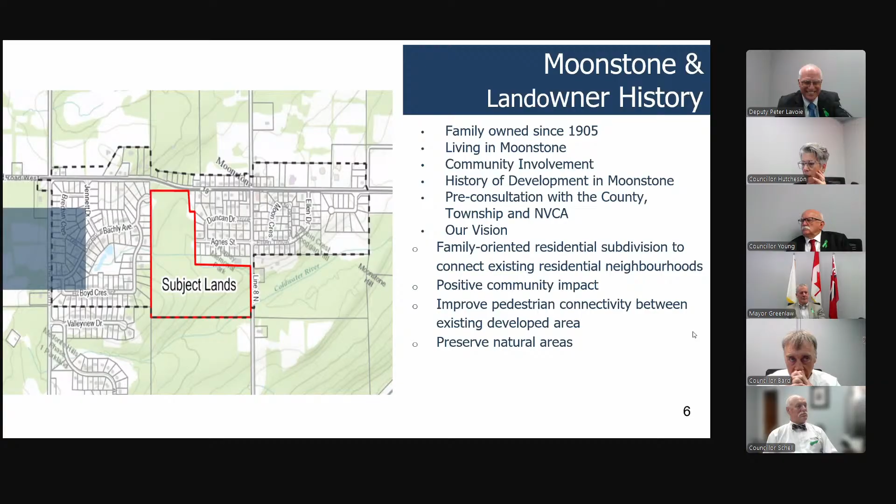Who's doing this? Andy? Okay. Okay, so just move ahead there, Andy.

Okay, so just as far as the planning background, your official plan has identified Moonstone, and in particular these subject lands, which have an area of about 24 hectares, as being part of the settlement area for the better part of 25 years or so. And so on that basis, we have, in your official plan, language which envisions or contemplates a development end state for these lands, and in particular to permit single detached dwellings. And of course, through provincial policy as well as your own official plan, there are a number of technical policies requiring subdivision applications to be appropriately supported. So to that end, let's just jump ahead there, Andy.

Again, there's a number of technical studies which accompany the application: environmental impact, hydrogeological, archaeological, geotechnical, hazard lands assessment, stormwater management, functional servicing, traffic assessment, as well as planning justification. So just in terms of the plan itself, again, 24 hectares, frontage on Line 8 as well as Moonstone Road East or County Road 19. Frontage on the county road of about 225 meters, frontage on Line 8 of about 250 meters. 68 proposed lots, and those lots range in area from 1,500 to I think 3,700 square meters.

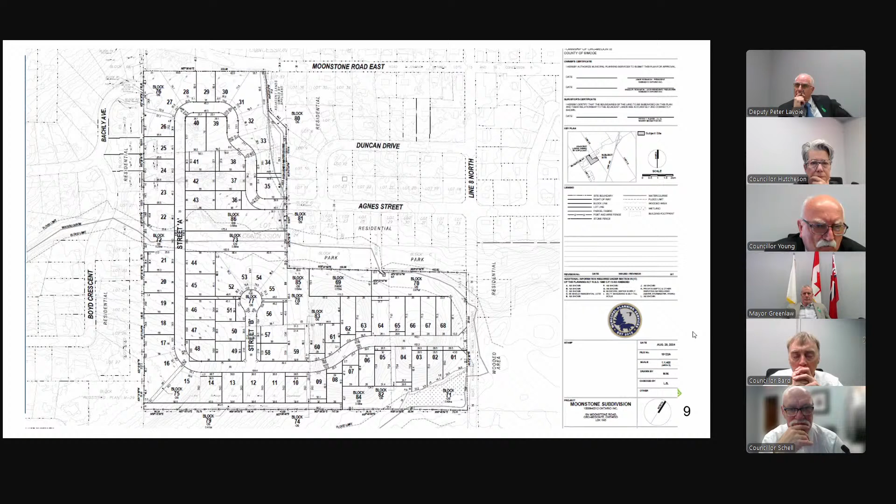The proposed parkland block is intended to complement or integrate with the existing park in Moonstone, Ramey Park, as well as a number of open space blocks which have been established or proposed through the site, essentially to accommodate existing watercourses, natural features, and existing drainage.

If we just jump ahead, what we have here is a conceptual rendering of the plan. It gives you a better idea of the context for integration of the parkland block, 3 proposed stormwater ponds, and the connection through existing Agnes Street as well as a direct connection to Line 8. No proposed connection to the Bachly lands to the west or to the county road.

Just next slide there, I think. Okay, so I'll just again try to walk through some of the salient aspects of the technical work that was done, starting with the environmental or natural heritage assessment. And the scope of this type of report, of course, is predicated on provincial policy and local official plan policy, which requires, firstly, the identification of natural heritage features and where identified, the protection and maintenance of those

features. The EIS also looked at species at risk, and again, in the identification of key natural heritage features, recommendations are focused on avoiding or restricting development in such areas, mitigation, and in a lot of cases, the work of the natural heritage experts doesn't end with a report like this. There's things that need to be monitored, things that need to be assessed as the site evolves in a development context. Next slide.

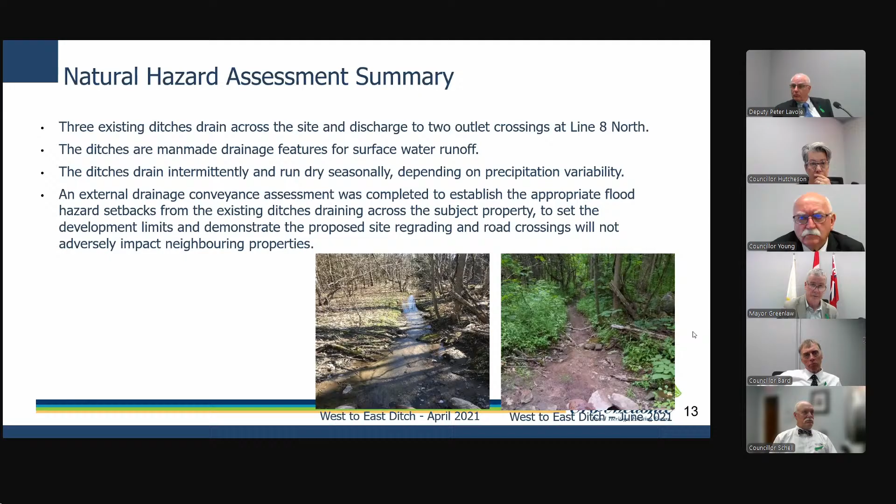And the next slide is just a visual of when the engineer takes on a study like this. Obviously, there's the pre-development situation and the post-development situation. And so, really, what these two illustrations help illustrate is that the nature of existing drainage through the site is essentially proposed to be maintained, but through design and engineering within the context of a subdivision plan, to ensure that the nature of those hydrologic flows are managed and maintained in the context of pre-development and post-development situations.

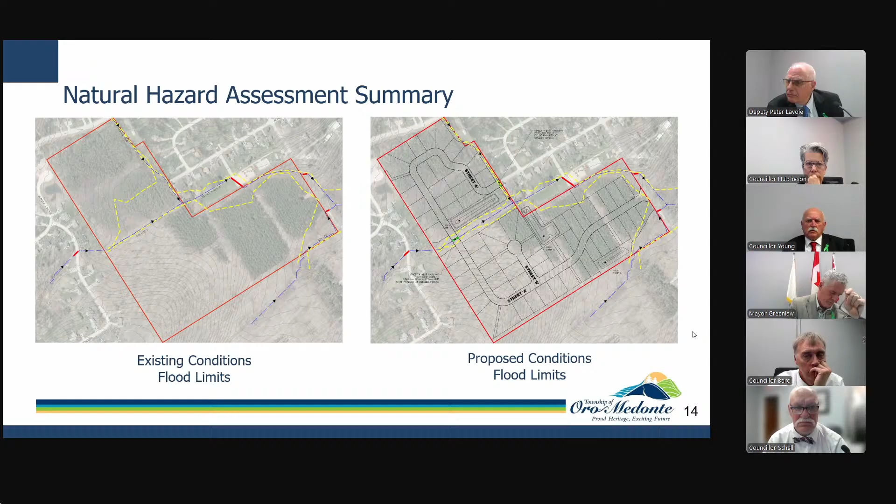So that's not a bad segue into stormwater management. And as we saw on the subdivision plan itself, as well as the rendering, what the engineers have proposed as far as stormwater management is a series of 3 inline ponds. And that certainly addresses the quantity scenario of stormwater storage itself. But then there's also the quality situation of essentially trying to ensure that as that water moves through the site, the quality of it as it leaves the site is improved.

And so that's where there's engineering design, and so we have design features like plunge pools, dry ponds, oil grit separators, or oil grit mechanical treatment devices. These are all things that are integrated as part of that stormwater plan. The report concludes that the post-development scenario can manage post-development flows to 1 to 100 year storm frequency, as well as the regional Timmins event.

So let's just move to the servicing summary. So again, Moonstone, as we're aware, is a partial service community. That means there is a water system, but septic servicing is by Class 4 septic systems on site. So a key element to the servicing assessment was the consideration of the nitrate criteria under the Ministry of Environment Reasonable Use Guideline.

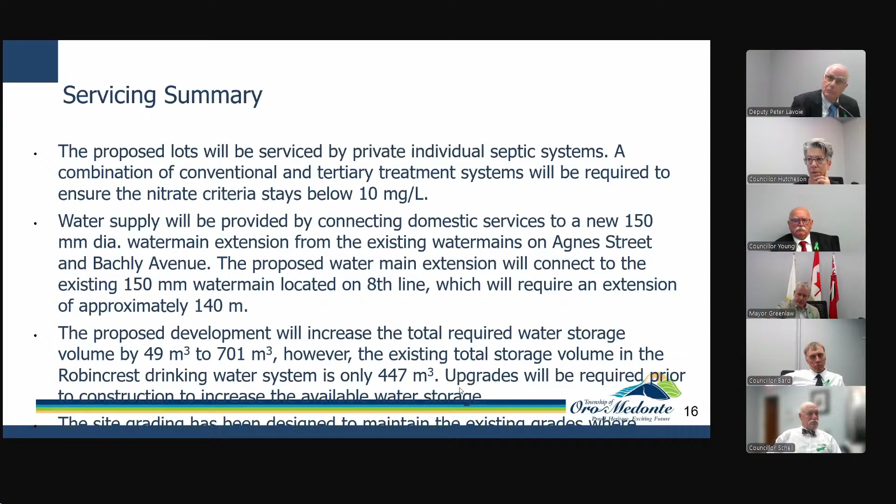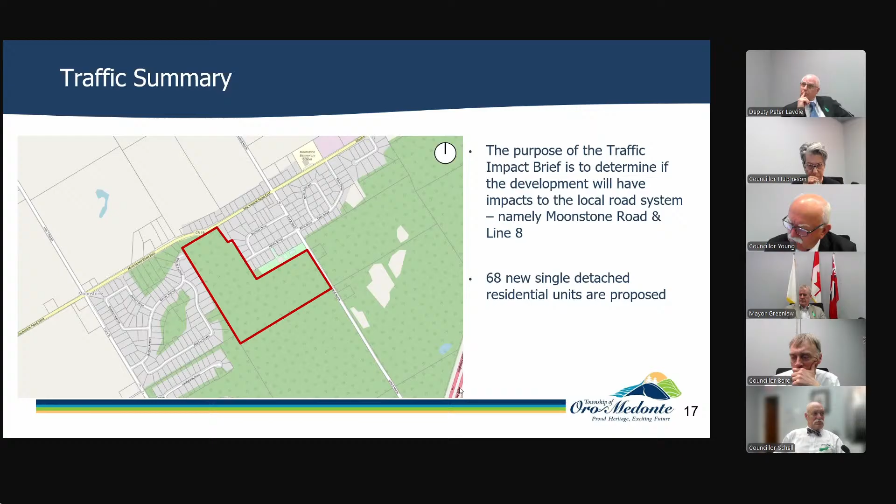And then we have, let's just move to the traffic summary. And so again, the traffic assessment considers the impact of 68 new single detached dwellings within the development area, within the settlement. And again, with those, let's just move to the next slide there. Again, with the understanding that new traffic connections are proposed from Line 8 as well as the extension from Agnes. And so then the focus of assessment becomes the pattern or modeling of traffic flowing from those new access points.

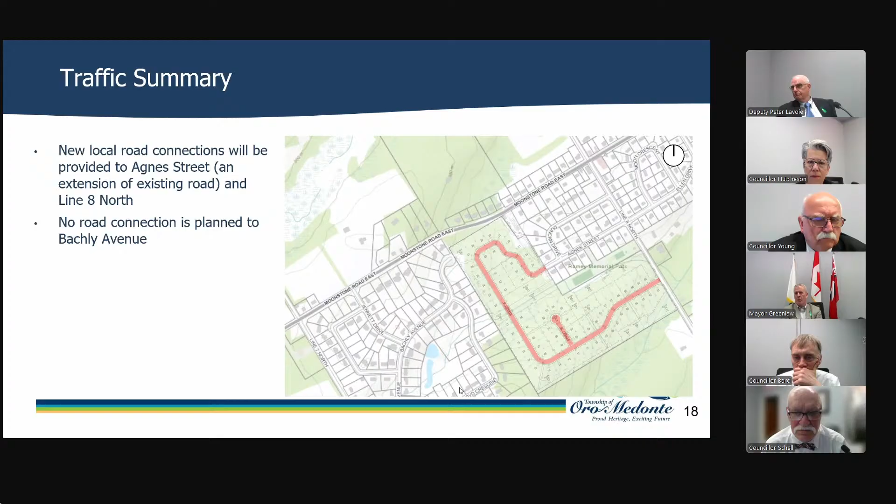If we just move to the next slide. And again, this just provides a graphic or an illustration of the assessment and consideration of those existing entrances, the current state of those intersections and their ability to accommodate existing traffic volumes compared to, again, proposed traffic volumes resulting from 68 additional residences. Overall, the study concluded that the proposed development would not have a significant impact on the adjacent road network, and the traffic generated by new residential units would be accommodated by the current road system with no need for road or intersection improvements.

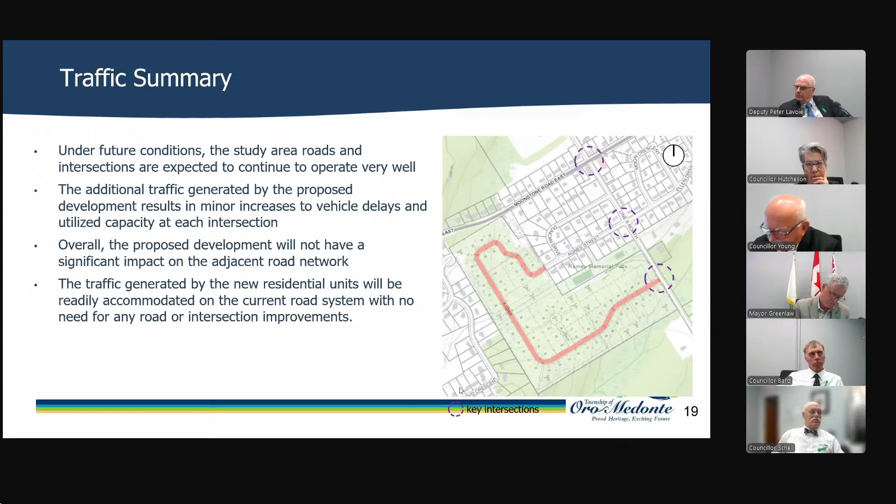And let's just jump ahead there. So as Jamie mentioned, we took the step of scheduling our own open house. That happened March 4th in Coldwater, and it was very well attended. And essentially, this presentation, which I've walked through tonight, was the presentation which was provided that night with each of the members of the consultant team speaking to their components of the application. And so obviously we took a lot of questions and heard a lot of comments formally and informally that evening.

And so certainly we heard concerns about existing stormwater infrastructure within the development to the west, and whether this application presents opportunities to address or fix any potential issues there. Concerns about traffic, construction impacts, stormwater management and site hydrology. We heard concerns about tree removal, environmental impact and buffering, as well as questions and concerns about the school. And again, support in some instances for the way that the road connection was managed by not intersecting the county road, not intersecting the Bachly subdivision to the west, as well as support for the park expansion and the manner in which it's proposed to complement the existing Ramey Park, as well as the aspect of the proposal involving trail linkages and that type of thing.

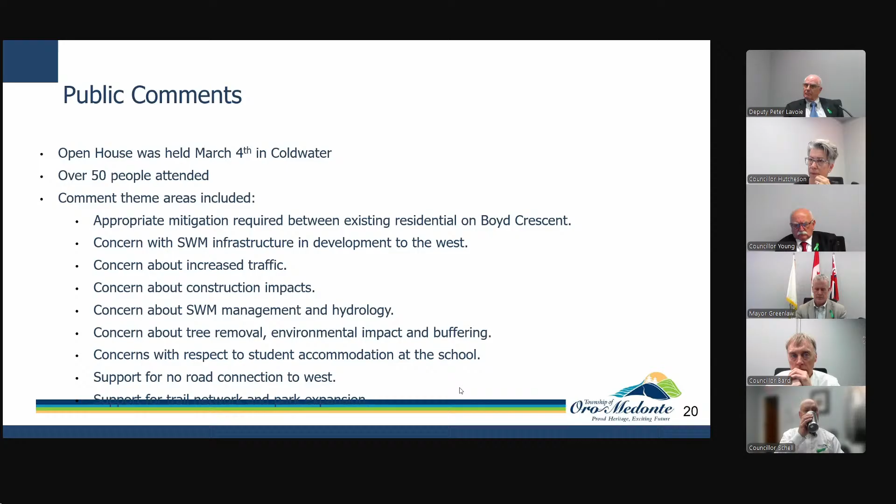And so from there, we look at next steps, and certainly as council is aware, applications like this, they're a marathon, it's not a sprint. And so even though there was certainly a lot of work that went into this leading up to the complete application of February 27th, public meeting is tonight, obviously, and we will move forward from there and work diligently with staff in the municipality and the various agencies that have put questions and comments on the table, as well as members of the public. With that, Mr. Chair, I'll turn it back to you, and if there's questions and comments, we'll certainly address those. Thank you very much, Mr. Jones.

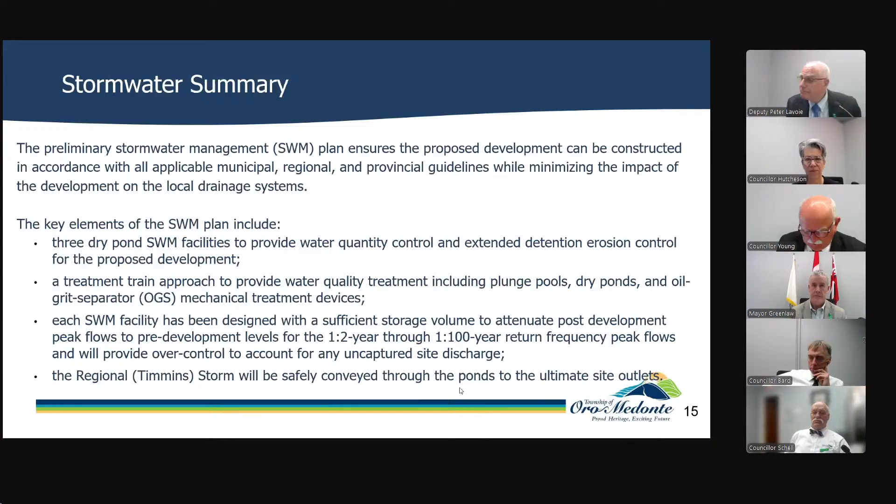Okay, do we have any questions for Mr. Jones or for staff with regard to the current presentation? Yes, Councillor Young. Thank you, Deputy. I've just got a couple of questions. I've been approached, or at least asked by some residents in Moonstone there, Valley View. And I know you got some long, thin areas there, which appear to be blocks. I'm looking at 75, or at least 15, 16, and 28, 27, and looks like 9 and 10. What are those long corridors? They've been named.

Are they on that? So, I'm sorry, Mr. Chair, what's the reference? Do you have the reference to a block number? Yeah, I'm just going to give them a minute here. Is it block 75? Okay, block 75. Yeah, it is block 75, and it's just a long corridor. So block 74, block 75, 76. Those are the trail corridors that are proposed to integrate and essentially offer some form of pedestrian passage, walking, running, biking, to the trail system.

Okay, the reason I asked is that, again, this is in the preliminary stages, and I've had residents advise me, whether those corridors can be extended to Valley View, otherwise the people that live in that area have to walk completely around, as opposed to simply walking at the end of the dead end there to the trail system itself. Is that possible? I mean, this is another concern, I guess. You rattle off the concerns there, but can that be done?

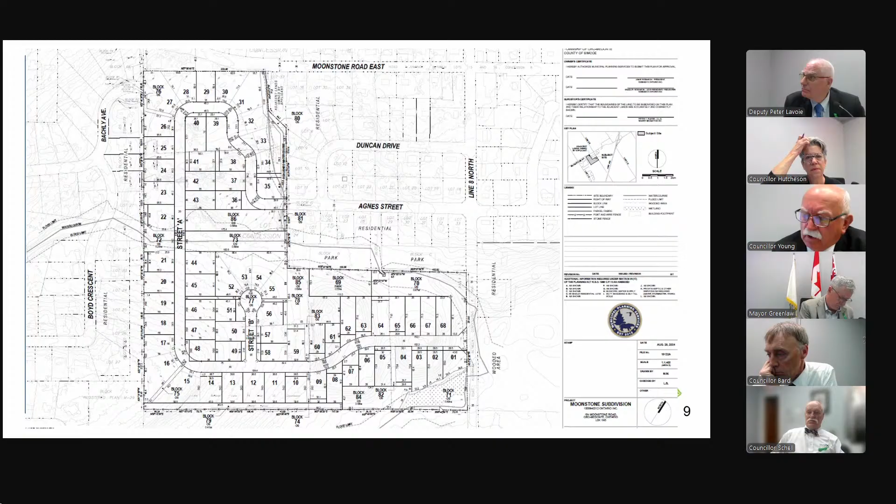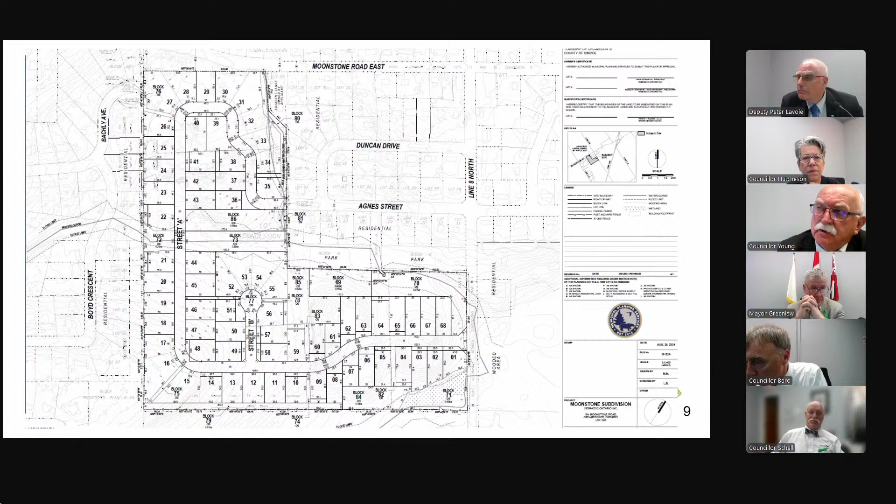The other concern was people that live on Moonstone. As I read the map here, at least the schematic, some of the houses that are planned are going to back onto the backyards of those people. What they're asking for is some sort of buffer, whether it's a tree system along there, a tree buffer, expressed by a neighbor or concerned citizen. This is a big development, and I don't know how many trees along there, if any, but it's just a way of maintaining their privacy as they have for years prior to this development being proposed.

So if we just look at that rendering, again this is a rendering, but it is intended as some indication that it would be the preference of the developer proponent to see a development scenario that would integrate or maintain as much existing natural vegetation, natural trees as possible.

Like a lot of areas of the municipality, that woodlot has taken a beating in the last about a month or so. But more to your question, the ability ultimately to maintain vegetation can be leveraged or manifested in a couple of ways, potentially through greater rear yard setbacks intended to maintain that buffer, or potentially through provisions in the subdivision agreement itself.

Yes, please go ahead, Councillor. Thank you, Deputy. Thank you for those answers, Mr. Jones. I'm just curious about something. I haven't walked that property as yet, but all I see is, I guess, man-made ditches to drain the property in part. Are there actually fish in that? Is there any rivers or ponds that would habitat fish?

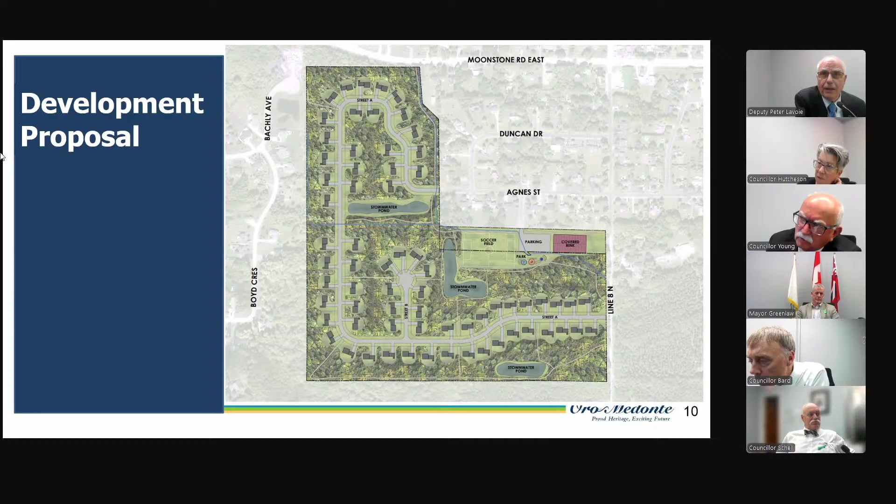Anyone else from chambers who wishes to address the matter? No? Oh, Mr. Jones? Yeah, thanks, Mr. Chair. Okay, so there's been a couple of questions.

I think the comment we just heard had to do with the functionality or mechanics of stormwater management, and in fact I think it was Ms. Hannon's comment that also talked about the nature of the weather events that we've just experienced and how the site has been characterized by some flooding and high water events. I guess the way that I would respond to that is to say that, again, my read and understanding of the engineer's report, which has specifically looked at pre and post development flows, is that the condition that exists there today is characterized as man-made, and water has basically just gone the way water goes, which is downhill. And so the nature of the technical work and the engineering that goes into trying to consider how, in a post-development scenario, to try to maintain that situation - well, it's precisely why you have people like this as part of the team informing the project.

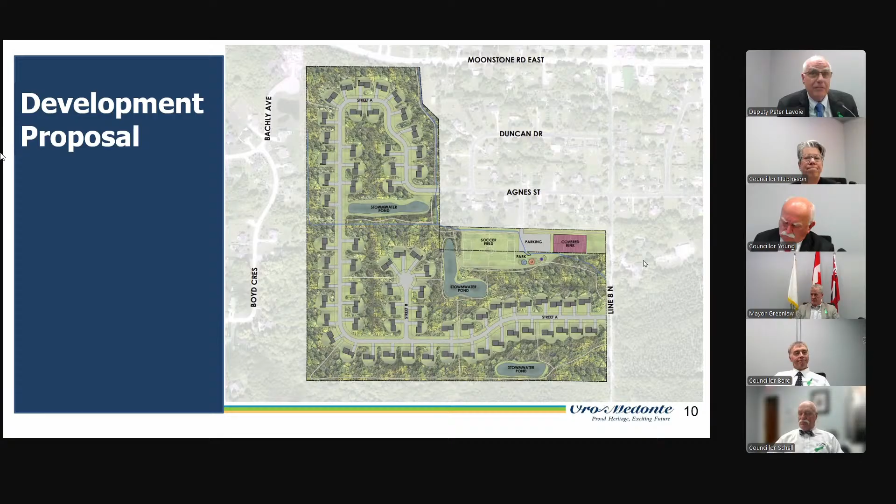Good, thank you very much. Having said that, we'll close this public meeting, and thank you to everyone for coming out tonight and for your comments and for trying to be as brief as you could be. I know that it's a passionate issue when these developments come up.

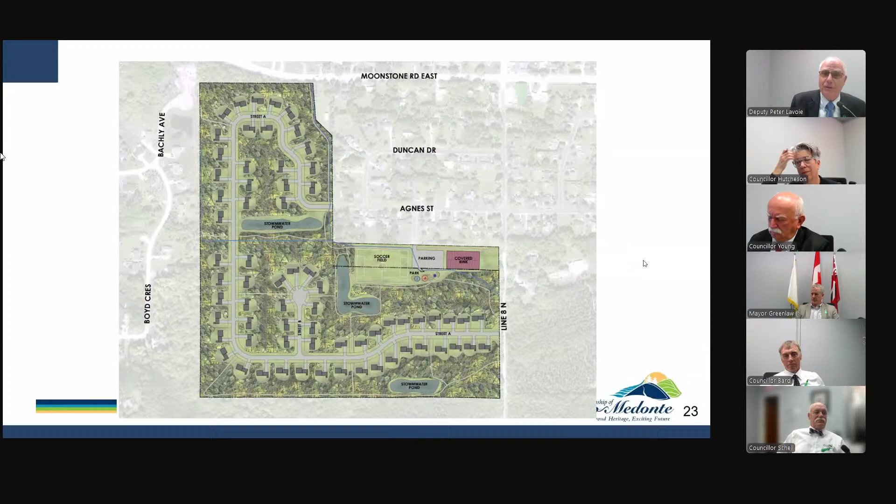So with that, we'll move on to item 5B on the agenda, which is application 2025 ZBA 17. The applicant is 2564150 Ontario Inc., Johnson's Fry Shack. Municipal address is 1937 Horseshoe Valley Road East.

This public meeting is being held in accordance with the provisions of the Planning Act to obtain public comments with respect to the zoning bylaw amendment application 2025 ZBA 17, submitted by 2564150 Ontario Inc. on lands municipally known as 1937 Horseshoe Valley Road East. Please be advised that this hearing is being digitally recorded for the purposes of the creation of a public record.

Might we open the door again, please? Oh, thank you very much, sir.

Please be advised that the hearing is being digitally recorded for the purpose of the creation of a public record. Only after comments are received from the public, township staff, and requested agencies will the Development Services Committee continue on to the public hearing.

Madam Deputy Clerk, has there been correspondence received on the matter? Correspondence received from the Township of Oro-Medonte Environmental Services, March 10; James Cordery, March 14 and April 1st; Dana Patterson, March 16 and April 21; Township of Oro-Medonte Fire and Emergency Services, March 17; County of Simcoe Transportation and Engineering, March 28; Township of Oro-Medonte Municipal Law Enforcement Division, April 10, and Enbridge Gas, April 14; Township of Oro-Medonte Building Division, April 15, and Operations Division, April 22; and Tara Ewert, dated May 7, 2025.

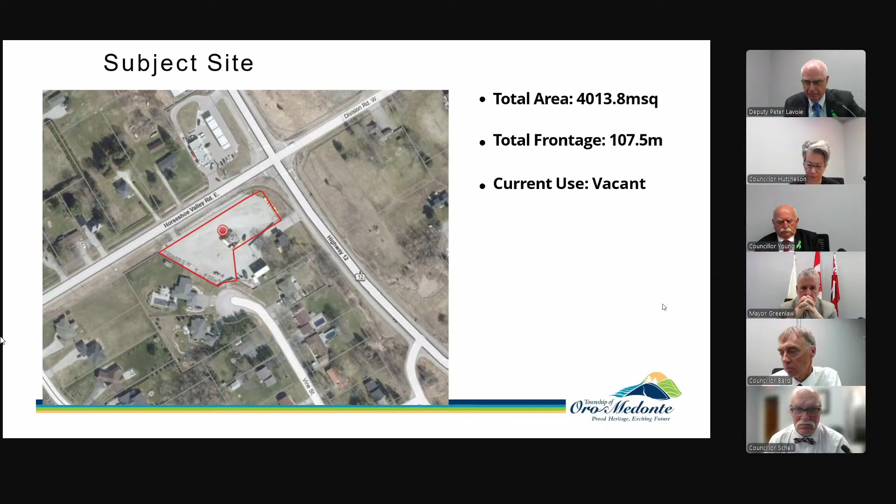Here we see the site in its surrounding context, including a 200 and 500 meter walking radius. The area includes a mix of residential, commercial, and rural land uses, and the subject site is well integrated into the local fabric. It's located on the south side of Horseshoe Valley Road East at the intersection of Highway 12 and Vine Street. Next slide.

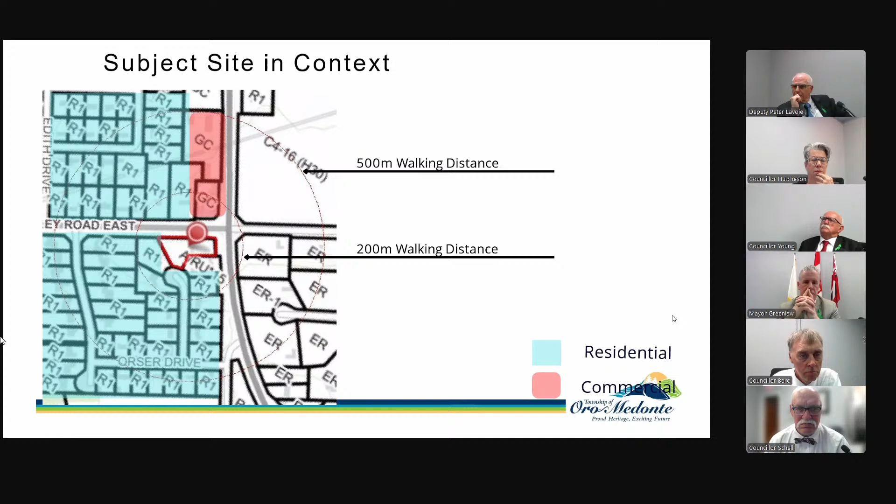The property is designated under the rural settlement area in the official plan and is zoned as local commercial. While the use as a refreshment stand aligns with the intent of the local commercial zoning bylaw, the current bylaw does not permit a refreshment stand as a principal use. Next slide.

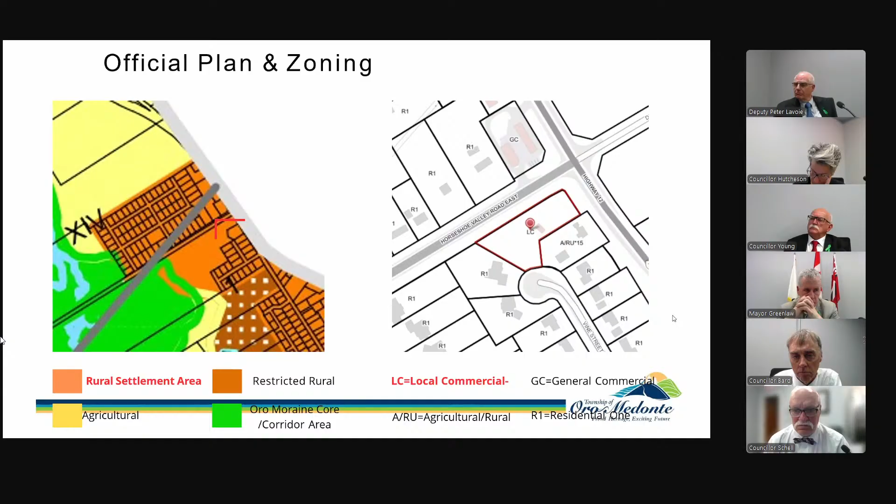We're proposing a 3-year temporary zoning amendment to permit a refreshment stand as a primary use, to reduce the rear yard setback from 7.5 meters to 1.43 meters, and to permit a 10-meter setback for a septic tank from County Road 22 instead of the required 15 meters. Next slide.

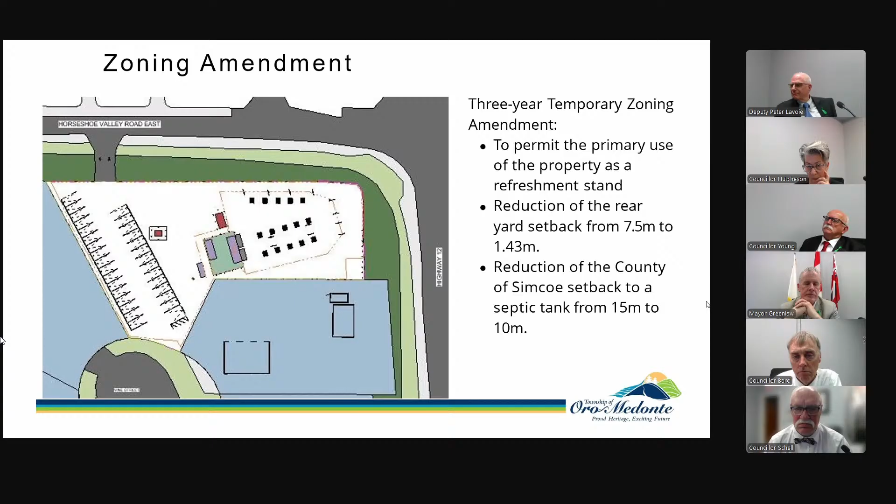The proposed layout includes a 27 square meter fry shack, a fenced staff area with a storage shed, 2 portable washrooms, and an existing septic tank with the addition of a biofilter shed. We also have a 1,300 square meter outdoor seating area and 176 meter square play area. We provide 29 parking spots and safety bollards along Highway 12.

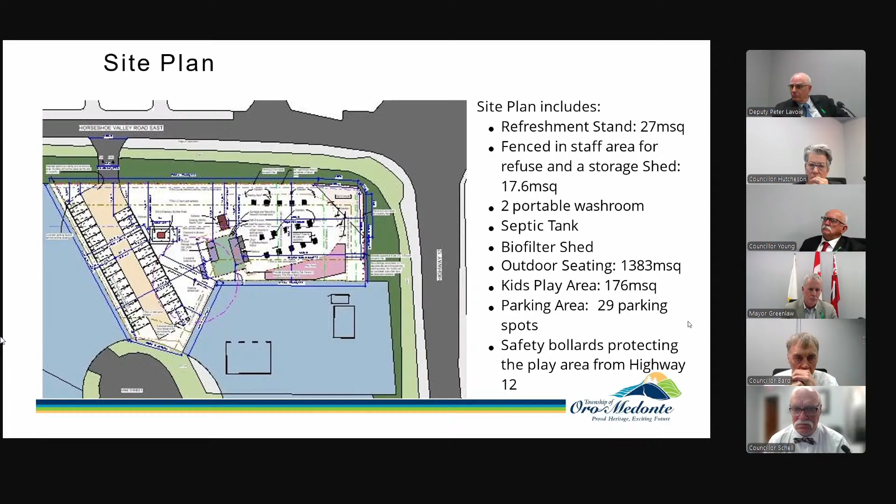Next slide. Access to the site is from Horseshoe Valley Road, and no through traffic will be introduced onto Vine Street. A transportation brief confirms no negative impact on traffic, as peak hour trips remain low since the site has already been operational seasonally.

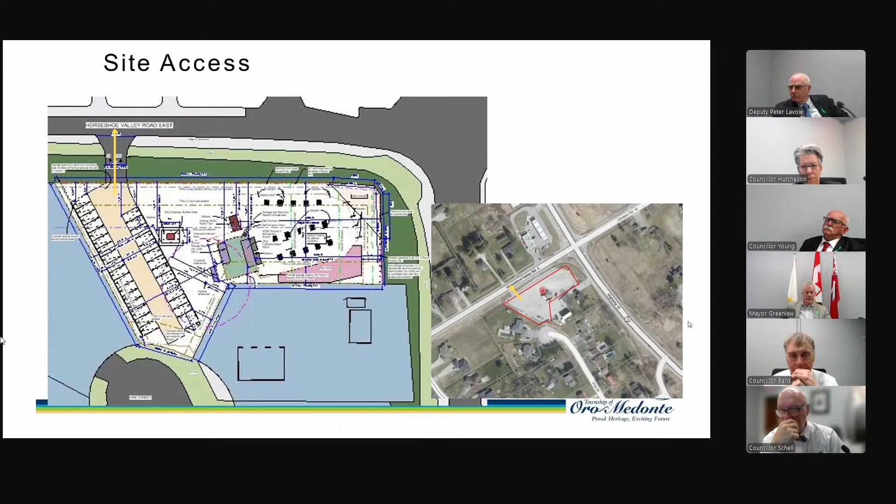Next slide. These are some recent images of the property showing the existing fry shack, the play area, and the seasonal use. This is a well-loved local and cottage traffic stop that offers a safe and friendly family experience.

Next slide. The application is supported by a full set of technical studies. We have a traffic brief that confirms low trip generation with no traffic concerns, a noise assessment that confirms compliance with MECP limits, stormwater management with no new runoff, and grading that ensures flow control. We have grading plans, photometrics, building drawings, and more. All the findings support the continued use with minimal impact.

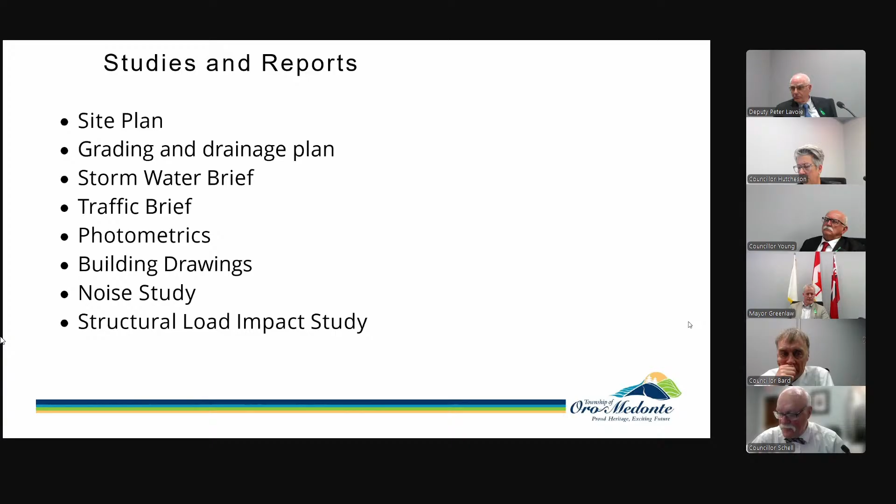Next slide. In closing, this application is intended to regularize and support a local business that has already proven to be a positive contributor to the community. It is consistent with planning policies and is technically supported and enjoys strong public support. We welcome any feedback from council or the public. Thank you for your time and consideration.

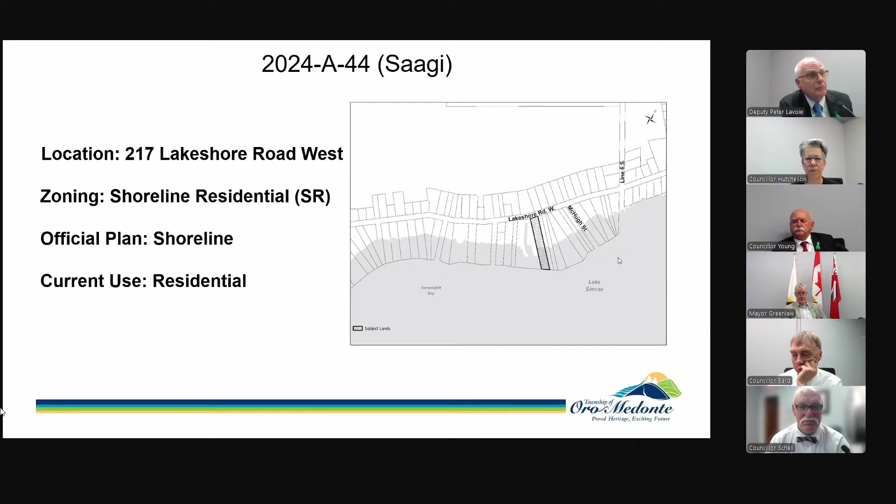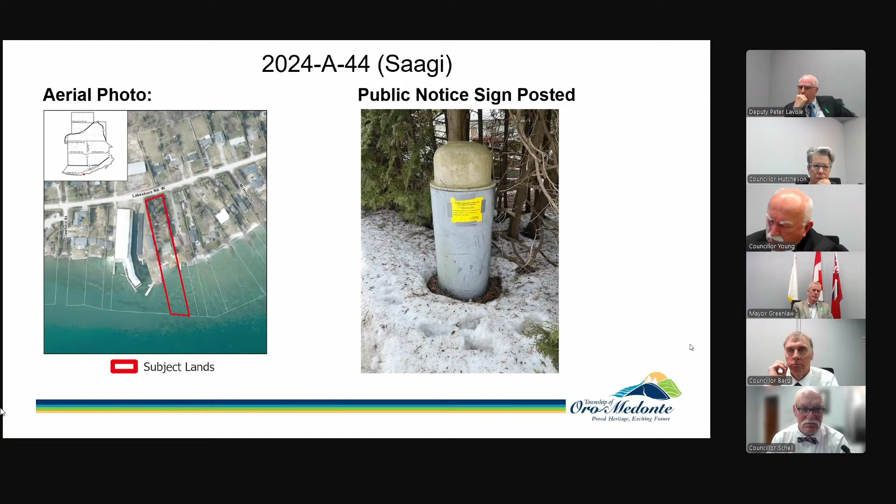The applicants are seeking relief from Section 5.1.3D of the zoning bylaw for the subject structures. The image on the left is an aerial photo of the property, and the image on the right shows that a public notice sign has been posted on the subject property.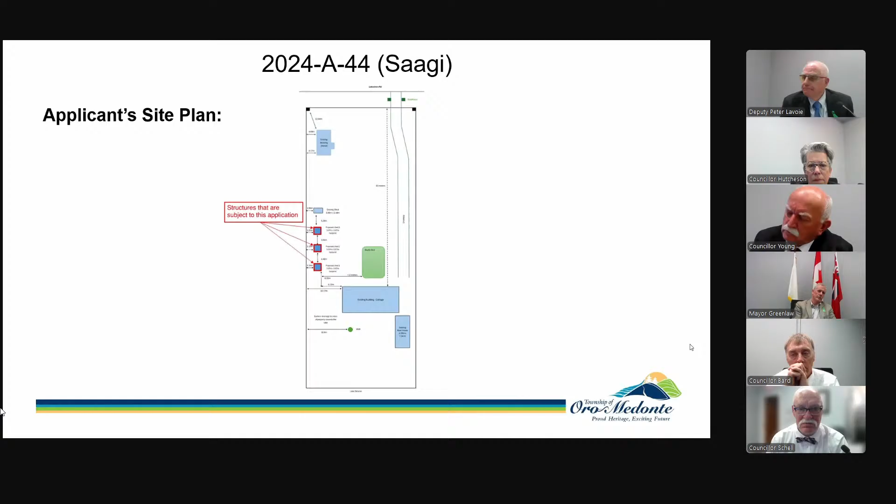This slide shows the site plan. The 3 sheds are located in a row from 1.1 meters to 1.2 meters from the adjacent interior lot lines.

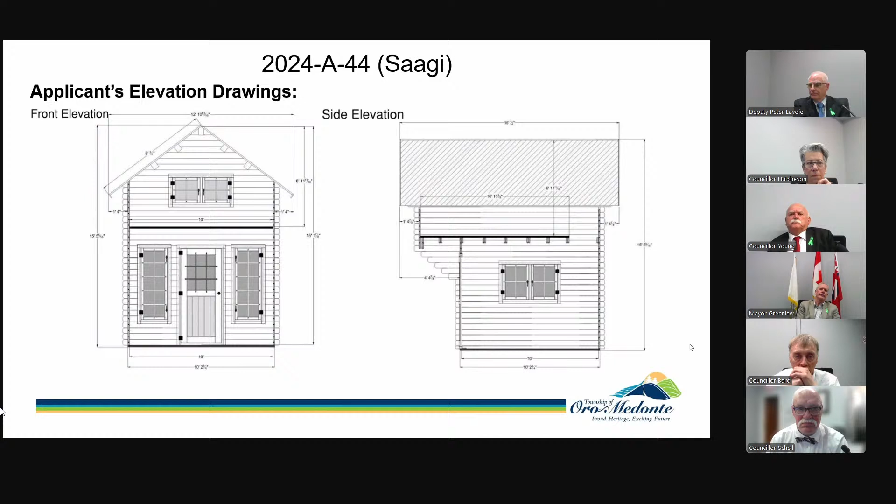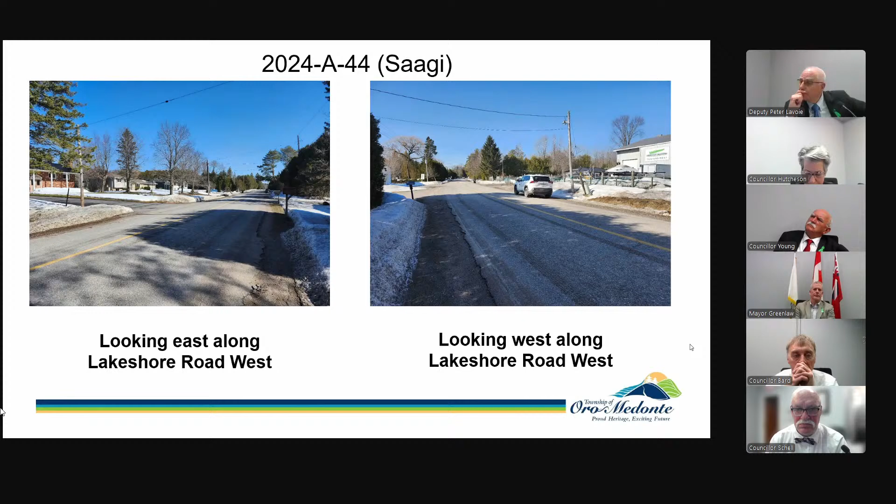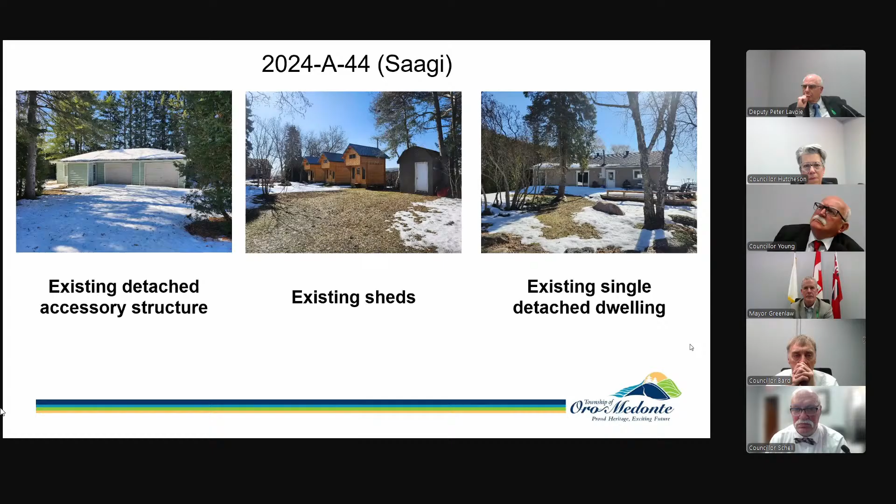Thank you all, committee members. I'm available for any questions. Thank you. Thank you very much, Ms. Fan.

Now I ask the applicant, Leo Saagi, who can correct my pronunciation of his name when he comes up to the microphone and states his name, if he has anything to add to the staff report. Mr. Saagi, please. It's close, it's Saggy. Saggy, there we go.

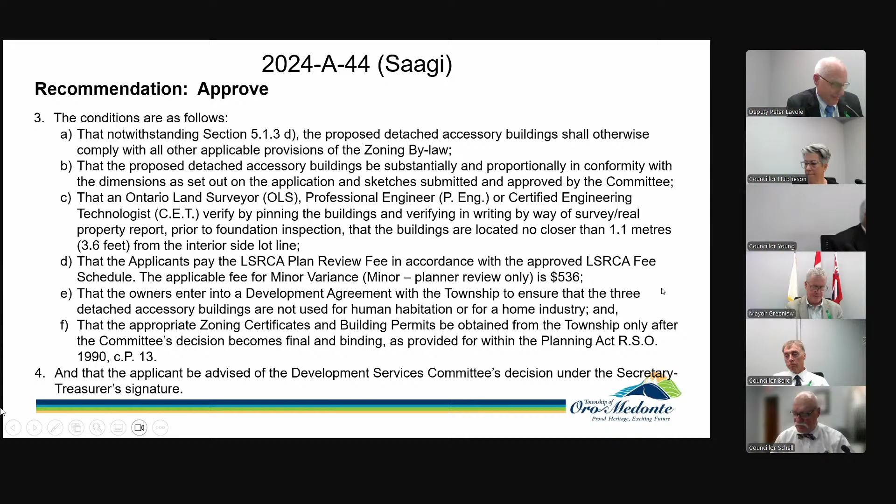Thank you very much. Any questions with regard to the motion? Seeing none, all those in favor? The motion is carried. Thank you, Mr. Saagi. Enjoy your 3 storage sheds. Thank you. We're going to take a 5-minute recess for the purposes of the council urgencies. So thank you very much, and give us 5 minutes and we'll be right back.

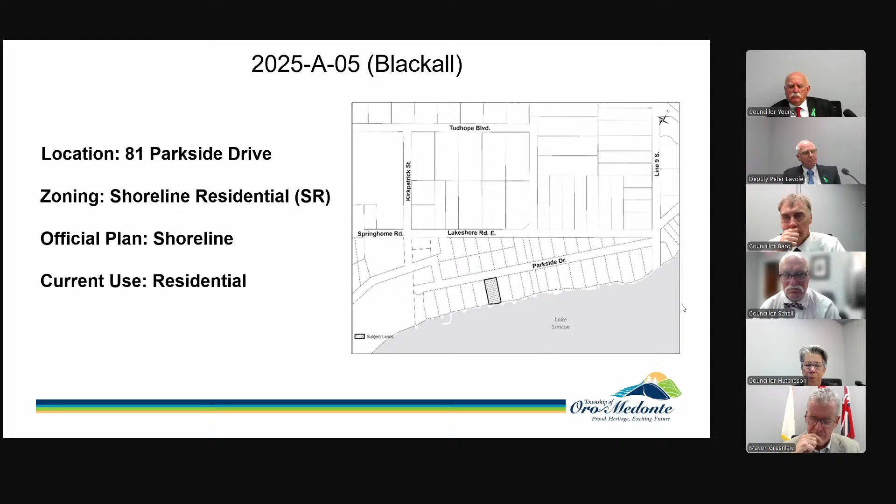The property is 0.19 hectares or 0.48 acres in size. It has 30.8 meters of frontage on Parkside Drive, or 100 feet of frontage, and it has a depth of 61.8 meters or 203 feet. The zoning is shoreline residential, and the official plan is shoreline, and the current use is residential. Next slide, please.

So the applicant recently purchased this property and is demolishing the existing unit and is proposing to replace it with a larger new dwelling unit, approximately 1 meter closer to the high water mark than the existing, with a new setback of 15.04 meters or 49.34 feet from the average high water mark, instead of the required 20 meters or 65 feet. The applicant also wishes to legalize the larger than approved floor area of the accessory building garage that was constructed previously on the property, and a second floor loft was added.

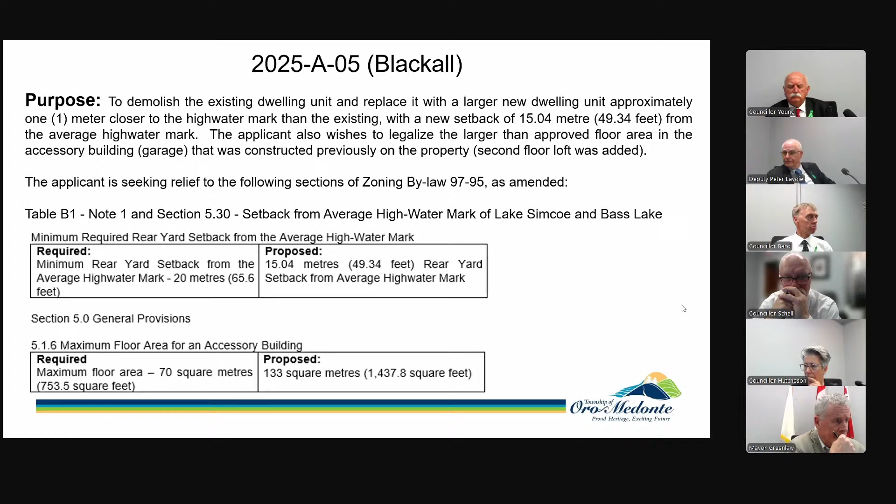So the applicant is seeking relief in the zoning bylaw in two areas. The required rear yard setback of 20 meters from the high water mark. They are proposing a setback of 15.04 meters. And the maximum floor area of an accessory building, the maximum under the bylaw is 70 square meters, and they're proposing 133 square meters, or 1,437 square feet. Next slide, please.

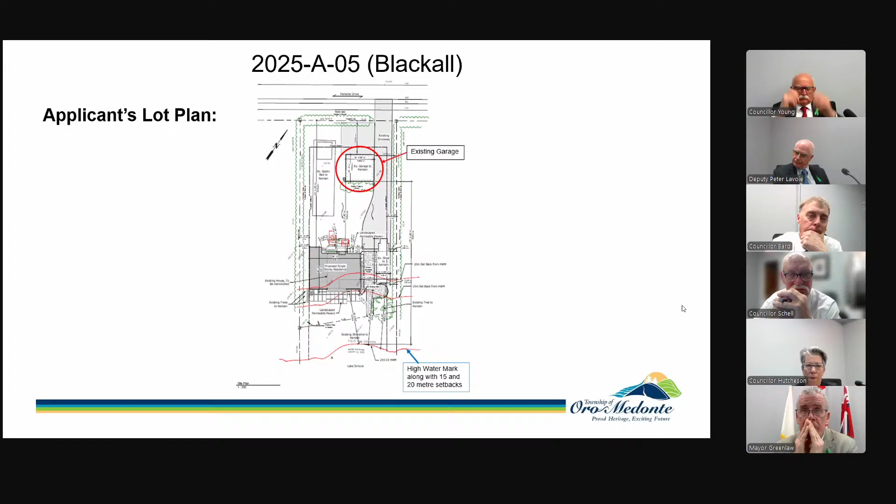So the one at the bottom is the high water mark, and the one in the middle is 15 meters setback from the high water mark, and the one in the middle of the proposed location of the cottage is the 20 meter setback. The proposed building is set back within the permitted limits of the zoning bylaw from the interior lot line, but it is close to existing vegetation, and I'll speak to that in a minute. Next slide, please. So these are some images of the proposed new dwelling unit. So the row on the top is basically what the new dwelling unit will look like from the road.

You could refer to that as the rear of the unit, and the row along the bottom is what's facing the lake with the large picture window there. You can see the little indentation for the window, and that's what encroaches that additional meter into what was the previous footprint of the older dwelling unit on the property.

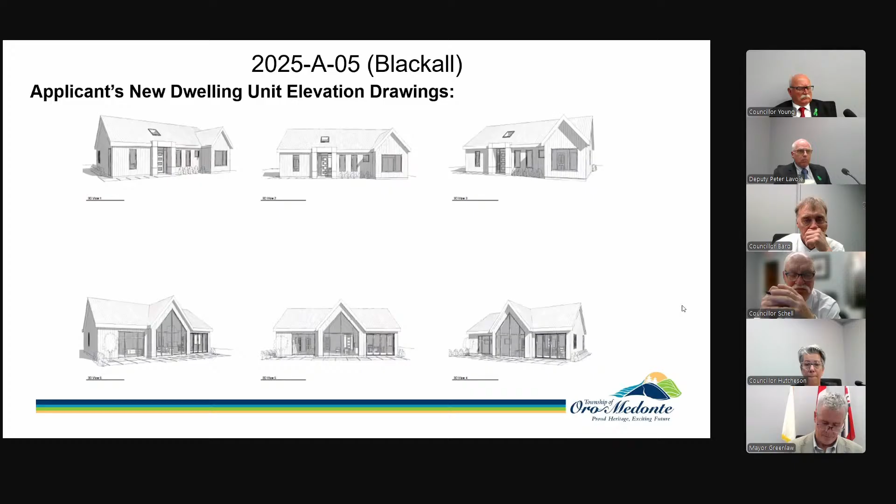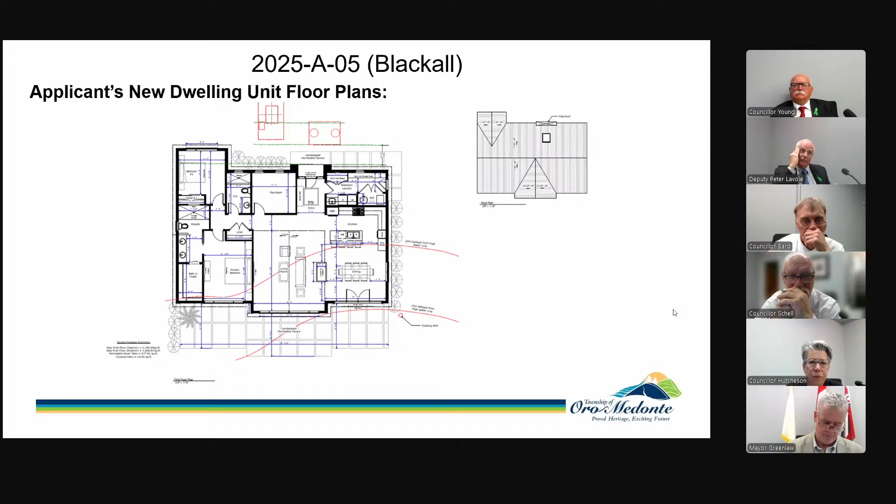Next slide, please. So this is the floor plan of the new proposed dwelling unit, and you can see that picture window at the bottom extends a little further out, and it's just nudging that 15 meter setback from the high water mark. Next slide, please.

So this is some images of the accessory building, and you can see the front and rear views, and those will be shown on some photos in the next few slides.

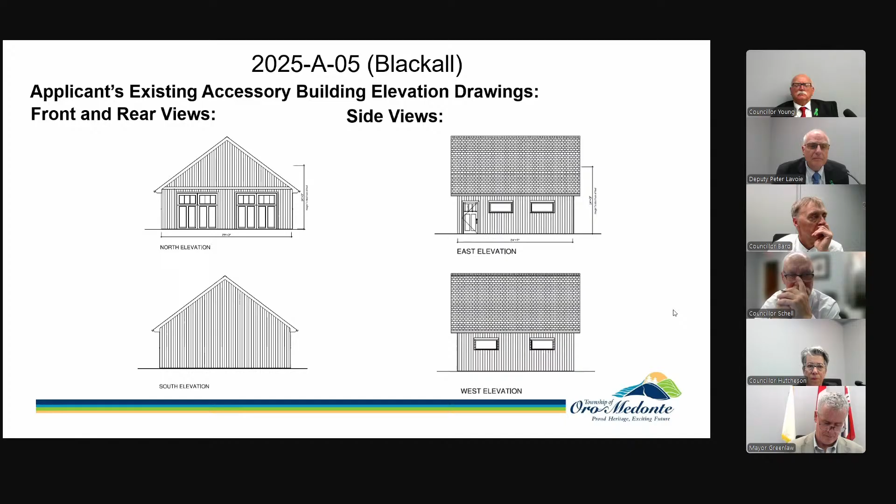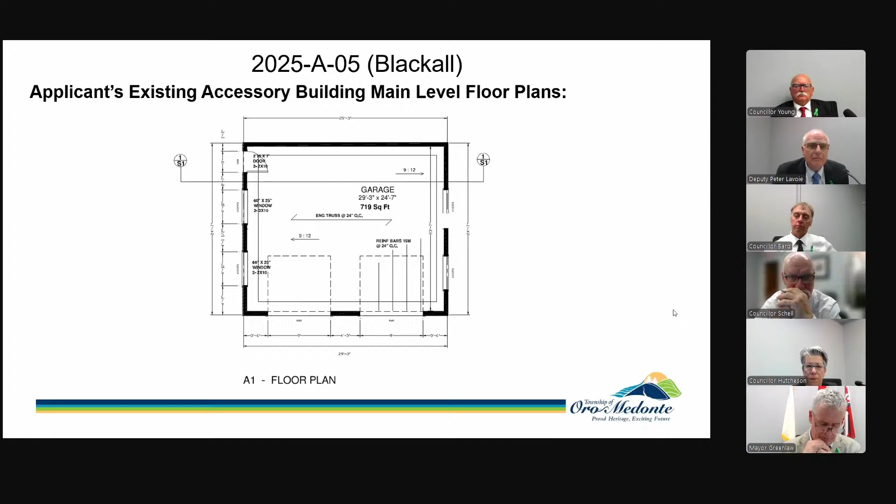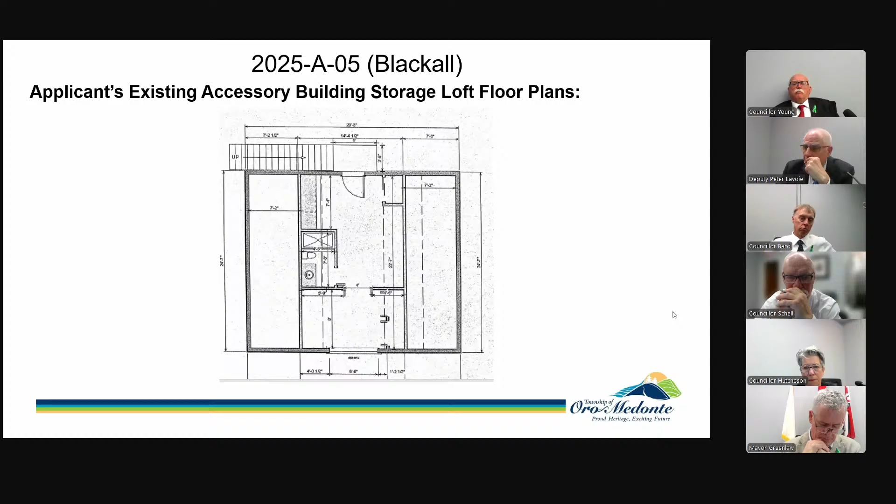Next slide, please. This is a floor plan of the accessory garage, and that's the main floor plan. Next slide, please. And this is the second floor floor plan. You can see a little stairwell, storage area in the middle, and there's a finished bathroom in that second floor loft area. Next slide, please.

So this image shows Parkside Drive on the left looking west, and on the slide on the right is looking east along Parkside Drive. Next slide, please.

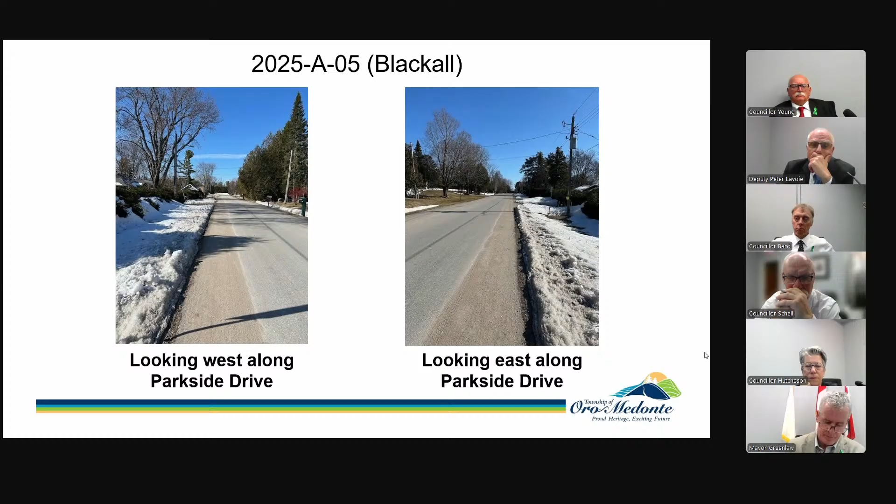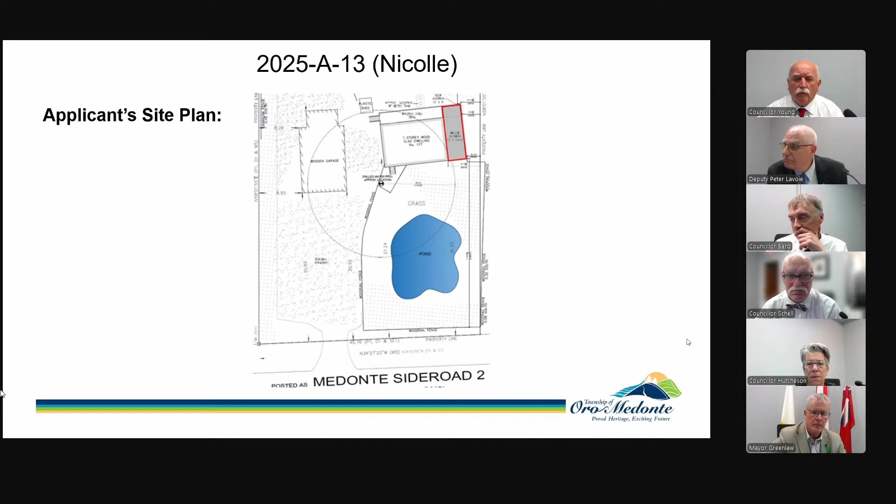The applicants prepared a site plan drawing which shows the existing structures on the property and the location of the proposed addition, outlined in red on the screen. The applicant also prepared some architectural renderings of the existing dwelling and the proposed addition. There's the front elevation, which shows the existing dwelling with the white colored roof, and the proposed addition to the right of that, shown in a darker shade.

Similarly, the rear, the backyard, looking at the rear of the dwelling shows the proposed addition in the shade color, and the side elevation, which is the subject of the side yard setback, shows the elevation proposed by the applicants.

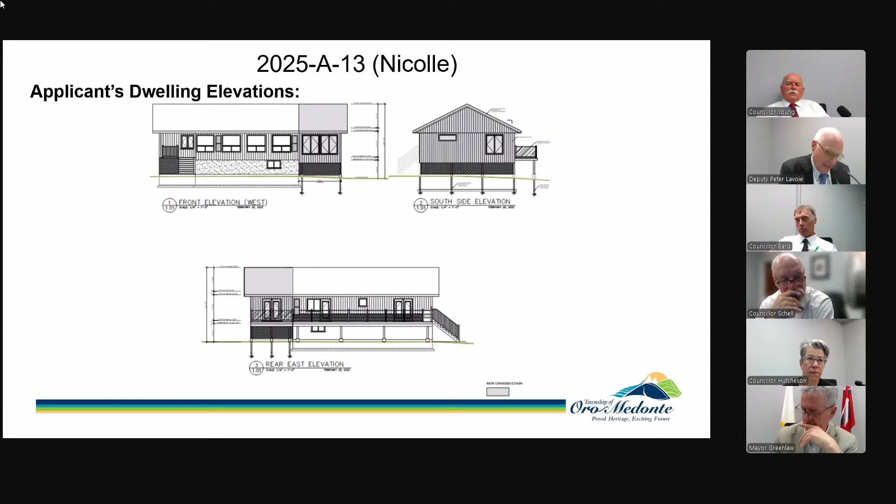Madam Deputy Clerk, may we have the motion for this hearing, please? Moved by Greenlaw, seconded by Young. It is recommended, one, that DS 2025-040, Andy Karaskakis, Manager, Planning Services, Minor Variance Application 2025-A-13, Nicolle, 177 Medonte Sideroad 2, be received and adopted.

Two, that minor variance application 2025-A-13, specifically to permit the construction of a 35.6 square meter, 383.5 square foot addition to the existing dwelling and a new 9.6 square meter, 104.0 square foot deck at the rear of the addition, with a reduced interior side yard setback of 2.69 meters, 8.82 feet, on lands municipally known as 177 Medonte Sideroad 2, Township of Oro-Medonte, be approved, subject to the conditions as outlined in DS 2025-040. Three, that the applicant be advised of committee's decision under the Secretary-Treasurer's signature.

Thank you very much. Any questions with regard to the motion? Seeing none, may I call a vote, please?

All those in favor? The motion is carried. That completes the application process and closes this hearing.

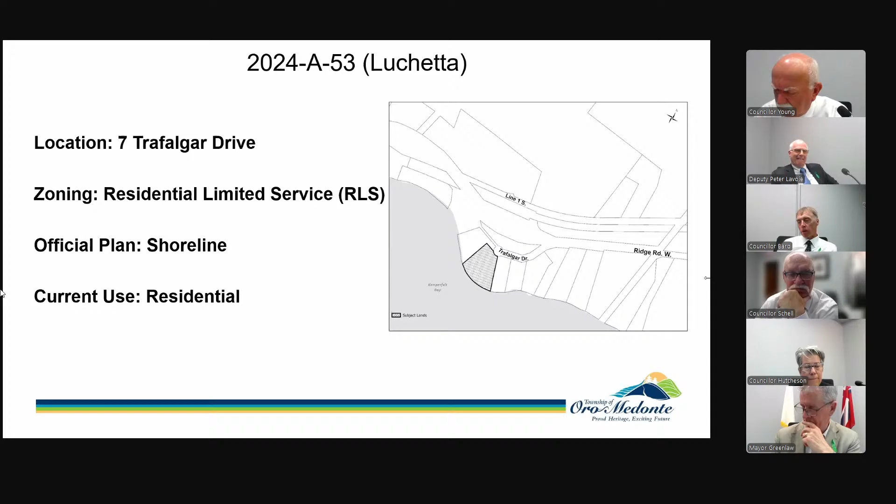The applicant is proposing to demolish the existing dwelling, construct a new single detached dwelling with a hardscaping patio at the rear of the dwelling to accommodate a swimming pool and hot tub, and is seeking relief to section 5.31, setbacks from slope, of the zoning bylaw, whereas the bylaw requires a 23 meter setback from the top of bank or an embankment that exceeds 33%. The applicants are proposing the pool and the hardscape patio to be set back at 12.05 meters and 16.11 meters from the top of the bank.

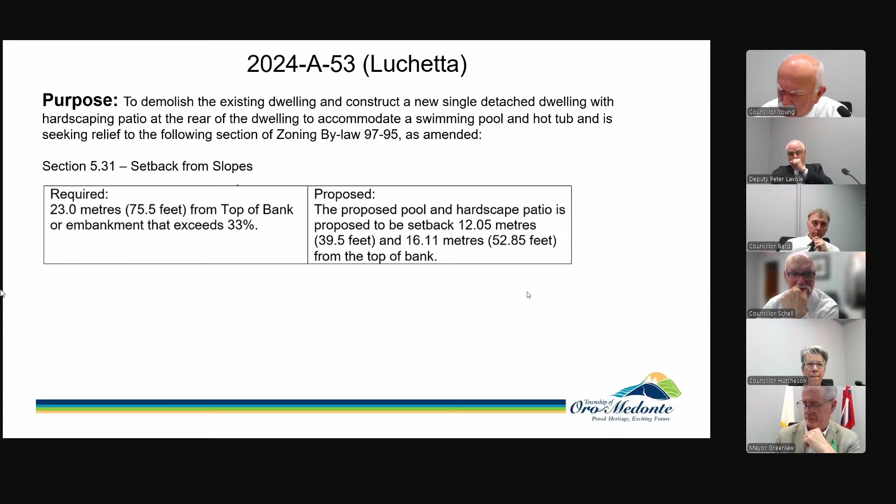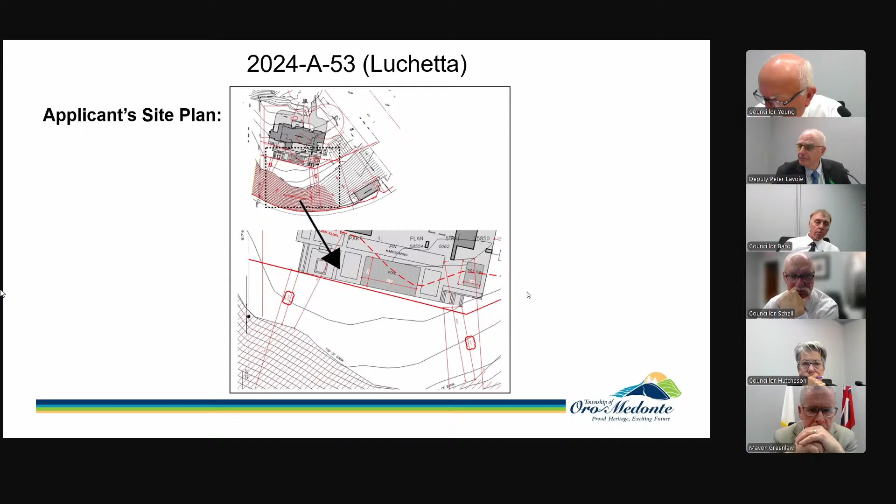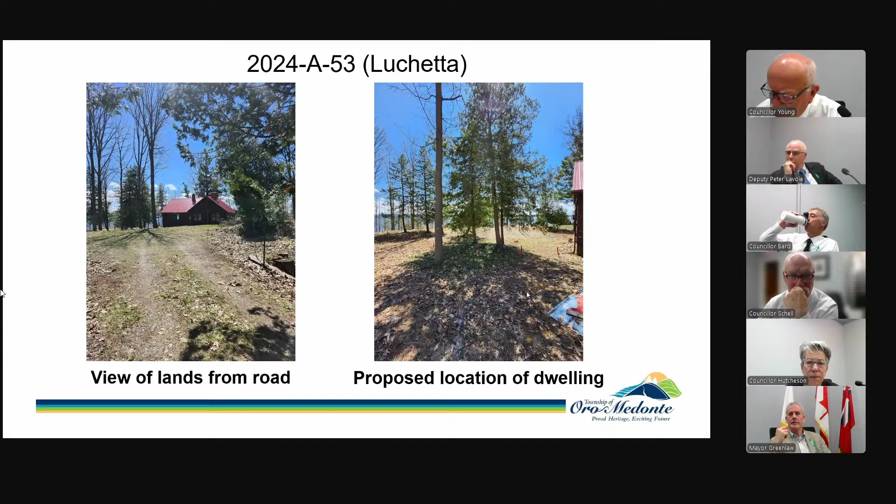Planning staff have reviewed the minor variance application in the context of the Planning Act and the 4 tests of a minor variance, and are recommending approval of the minor variance application, subject to the conditions outlined on the screen. Mr. Chair, that concludes my presentation. Happy to answer any questions.

Thank you very much, Mr. Karaskakis. I'll now ask the agent Danielle Bilodeau, who is registered to speak to the application, if she has any comments to further the staff report.

Ms. Bilodeau, please. Hi there, can you hear me all right? I can indeed. Perfect. So Andy touched on pretty much everything, but I'm just going to add that to ensure that this proposal will work, we did get a slope stability assessment completed, and the township did review that and deemed it acceptable.

And the study did list some constraints in regards to development, including maintaining the existing vegetation. In the pictures, we could see the topsoil, and there's a lot of leaf cover on the slope. So in the slope stability study, they recommended that all be maintained, and the owners are happy with that. That's all I'll add, but if anybody has any comments or questions, I'm happy to answer them.